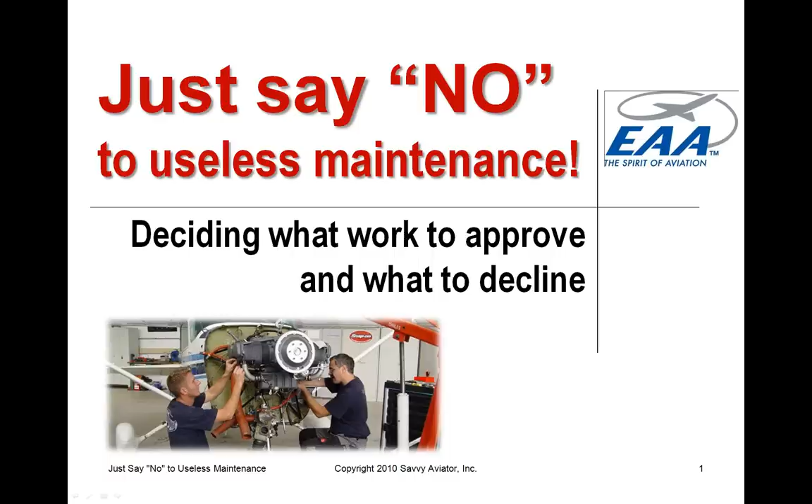Okay, well, good evening, everybody. Looks like we've got about 180 people in the room right now, and that's great. My name is Mike Busch, as Charlie introduced me, and I'm a regular columnist since the beginning of the year in the new and improved EAA Sport Aviation.

The subject for tonight's talk, this is actually a presentation that I first put together for the Forums Plaza at AirVenture 2010, and we're going to try to do it tonight. It's going to be a little challenge because the Forums Plaza presentations are an hour and 15 minutes long, and I guess I'm supposed to fit this into 45 minutes, so I guess I'll have to try to talk fast.

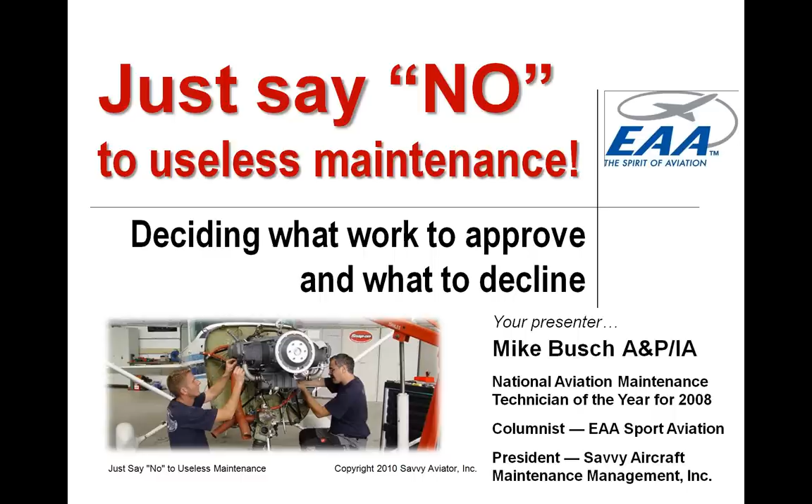In addition to writing a monthly column for Sport Aviation, I spend most of my time these days running a company I started about 3 years ago called Savvy Aircraft Maintenance Management. We're in the business of providing professionally managed maintenance for owner-flown general aviation aircraft, and in that role we manage a lot of maintenance on a lot of airplanes. In the last 3 years or so, we've probably managed about 400 annual inspections.

And the focus of what I'm going to be talking about is mostly stuff that comes up at annual inspections. So I just want you to know that this is hardly theoretical, that we're using the techniques that I'm about to talk about tonight every day.

The aircraft that we manage sort of run the gamut of certificated GA piston-powered aircraft, 90% singles, 10% twins. But we manage more Cirrus aircraft than everything else put together for reasons that just have to do with the demographics of Cirrus owners - they tend to be people that would prefer to hire somebody to manage their maintenance rather than to deal with it themselves. But what we do is no different than what the typical aircraft owner is supposed to do when he manages his own maintenance.

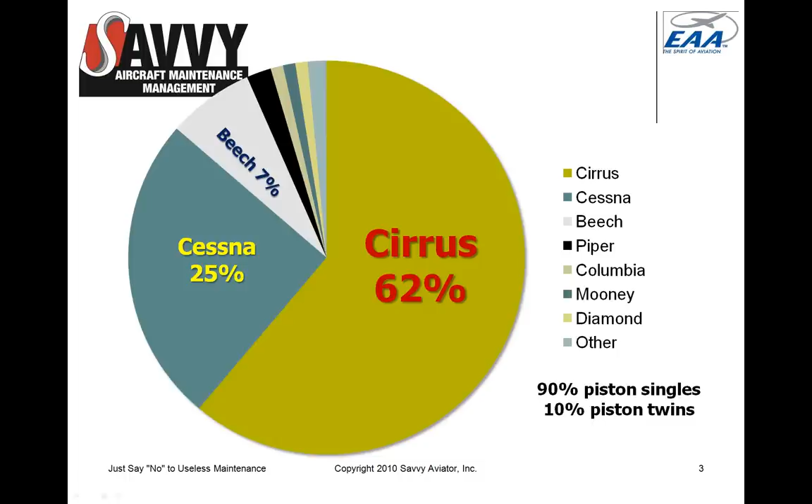And so because we do so many Cirrus annuals, I'm going to focus tonight on a case study involving a Cirrus, but nothing that we talk about is in any way Cirrus specific. I will be talking mostly in the context of certificated aircraft. Things are a little bit different when we're talking about experimentals - for example, we don't do annuals, we do condition inspections. But a great deal of what I'm going to be talking about also applies to experimentals.

And for the purposes of the discussion tonight, I'm going to use as a case study an annual inspection that we got involved in, involving a 2003 Cirrus SR-22 owned by an owner named Allan. I won't mention his last name. But Alan lives in the Portland, Oregon area, and he works up in Seattle, and he uses this airplane pretty much to commute to work, and he sort of just flies up and down from Portland to Seattle and back pretty much every day of the week, and so he flies a lot. This is his commuting vehicle. He bought the airplane 7 years ago. He's got over 1,800 hours on the airplane, in fact almost 1,900 hours, flying about 250 to 300 hours a year.

And he had been in the habit since buying the airplane of having his annuals done at the Cirrus Service Center up just north of Seattle. Typically, these annuals would cost him $5,000 or $6,000 a year. In 2010, he had to go off on a business trip to India just about the time his annual came.

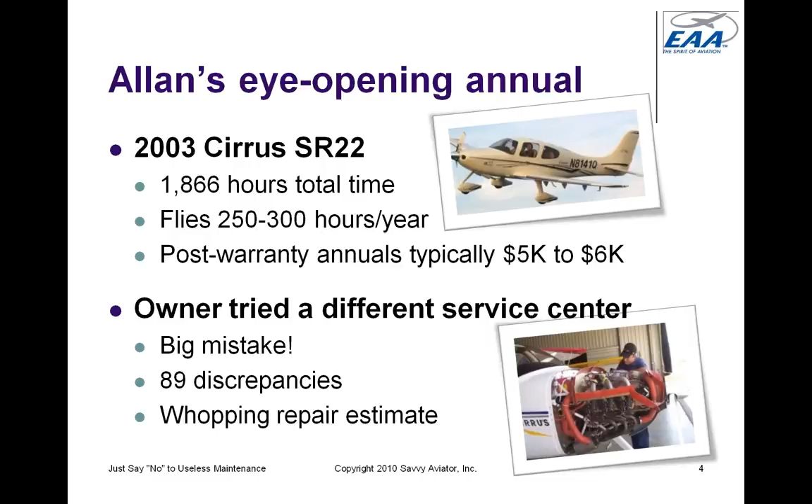Then he got the shock of his life, because about a week later, he gets an email from his shop in Portland giving him an estimate to repair the airplane and make it airworthy, including 89 discrepancies and a repair estimate that pretty much lifted him right off the floor. I'm not sure the slide says 'whopping' does total justice. The repair estimate he got was parts and labor combined, almost $25,000.

That kind of got him. The service center he put the airplane in, in Portland, was probably the worst Cirrus Service Center in the country. In fact, it was so bad that the same week he dropped off his airplane, Cirrus decertified this service center and made a different shop the Cirrus Service Center instead. But apparently Alan had not done very much due diligence into the shop, figured it was a Cirrus Service Center, had to be okay, and then a week later he's in India and he gets an email with this $25,000 estimate.

At which point I got an email from Alan. I took a look at this estimate that he emailed me, and I'll walk through it with you very quickly.

The first line item on the estimate was an annual inspection flat rate, just for the inspection part, at $3,645. That's a little bit high, but not out of limits. Typically the annual inspection on one of these airplanes is somewhere between 25 and 30 hours, so generally they come in around $3,000 or a little less. The $3,600 was high, but this particular shop actually included more stuff in their flat rate than most shops, so I didn't consider it out of bounds.

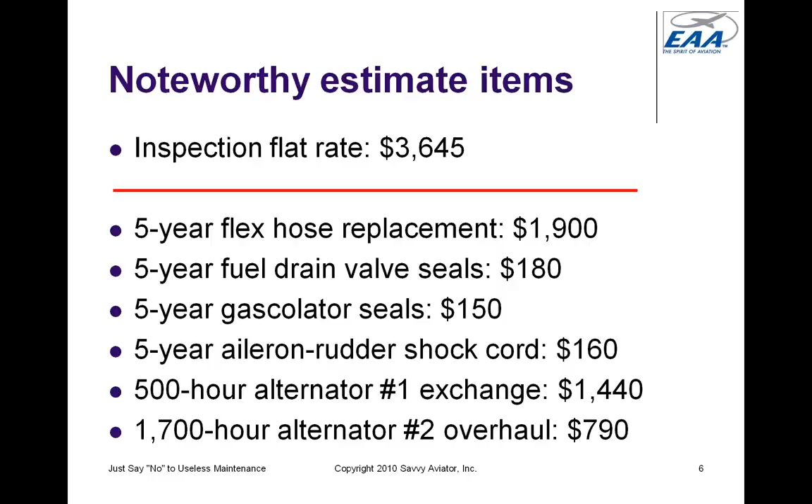The recommended TBO on his McCauley propeller was 6 years or 1,800 hours, whichever comes first, and the overhaul cost is $3,720. It's a three-bladed constant speed propeller. TCM for overhaul of the magnetos every 4 years, $1,700 for the two of them.

Main battery - Cirrus calls for replacing the battery every 2 years, $700. That's a pretty pricey battery. Also, they call for replacing the filter in the TKS anti-ice system every 2 years, $320 parts and labor combined. Fuel injector nozzle cleaning, recommended every year, $200.

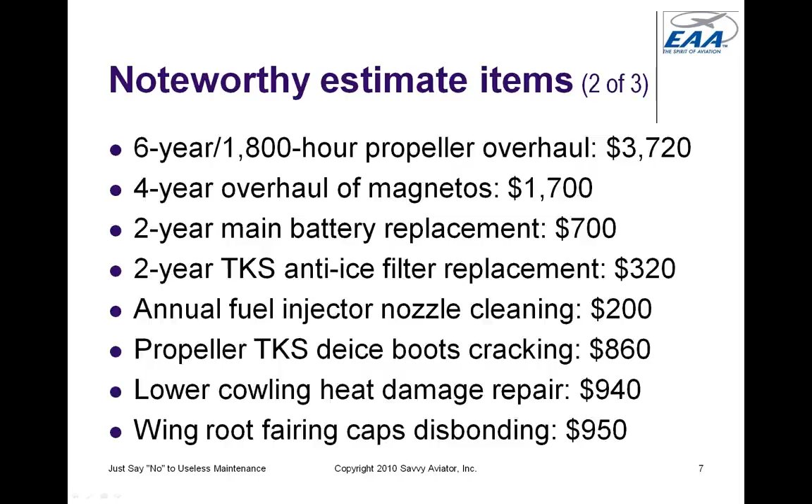The rubber de-ice boots on the propellers, part of the TKS system - the shop reported they were cracking and wanted to replace them for $860. The lower cowling had heat damage in the exhaust trails, and the composite repair charge was estimated at $940. Wing root fairing caps were starting to disbond, costing $950 to reattach. Muffler flame cones were warped, so the shop wanted to replace both mufflers for $2,280.

The airplane still had its original 121.5 ELT, and the shop suggested it should be changed to a 406 megahertz unit, since the 121.5s are no longer being monitored. $1,750 was the estimate for that. Miscellaneous cosmetic paint touch-up estimated at $1,620, plus about 50 additional minor squawks totaling $1,425, for a grand total of $24,730.

Alan had one of these oh my God moments, which we occasionally have, on the management of an annual in the middle of the annual - realizing that if somebody wants their maintenance professionally managed, they need to sign up with us before the annual starts, because picking up management halfway in the middle is generally very difficult. I frankly felt so sorry for Alan that I made the decision to break our own rule and take him on as a client in the middle of this annual. He was off in India, his airplane was in this horrible shop up in Portland, and against my better judgment, we decided to take it on.

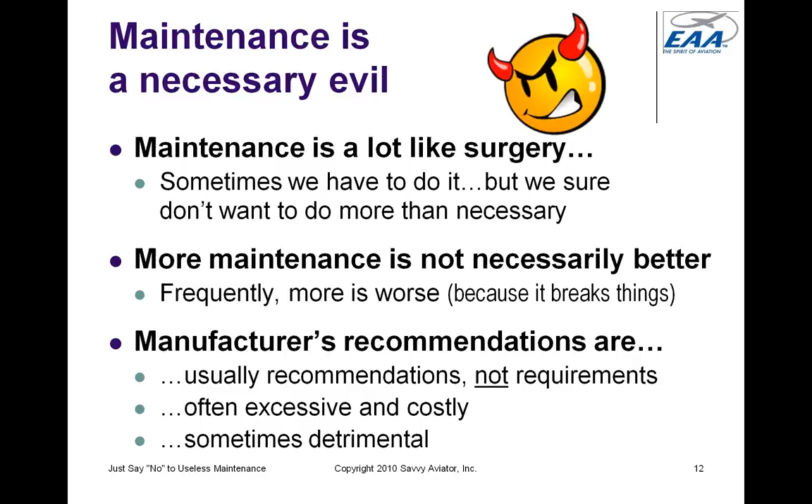We'll get into some of that in detail here. But it is the owner's job to say no to maintenance. Mechanics will always do maintenance by the book - in other words, following manufacturer's recommendations, unless you instruct them not to do that. And the reason they will always do it by the book is because if they take it upon themselves to say, well, the manufacturer recommends this, but I don't think that's really necessary, they expose themselves to serious liability in case something goes wrong.

The number of lawsuits against shops and mechanics has absolutely exploded in the last 15 years or so, as a kind of unintended consequence of the General Aviation Revitalization Act of 1994, which basically took manufacturers off the liability hook for aircraft more than 18 years old. Doing that didn't make the lawsuits go away - it just meant that everybody other than the manufacturer who has anything to do with the airplane tends to get sued a whole lot more than they used to. So there's been an explosion in lawsuits against mechanics and shops in recent years. As a result, mechanics are reportedly very, very nervous about being sued.

And if you were in that position, you'd be nervous too. So they tend to, much more than say 20 years ago, do everything exactly by the book unless the owner instructs them not to. If you instruct your mechanic that you do not want something done that the manufacturer recommends, and you do that in writing - providing something saying 'I decline whatever this maintenance task is' - your written instruction to the mechanic is his get-out-of-jail-free card in the event of a lawsuit, because the reason he didn't do that task is not because he decided not to, but because you made the decision not to do it, and that's really who should be making these decisions anyway.

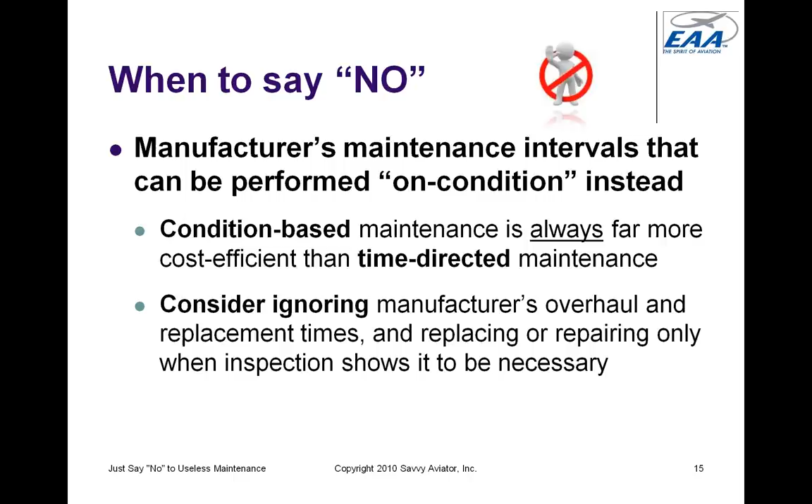So we want to consider ignoring manufacturers' overhaul and replacement times and other arbitrary time-based things, and replace or repair only when inspection shows it to be necessary. The only time we'd do things on a schedule basis is when there's no reasonable inspection that can determine when the work is necessary. Engine, propeller, and other TBOs are excellent candidates for this condition-based approach.

I recommend to all of our managed maintenance clients that they should almost completely ignore manufacturers' TBO recommendations. I have practiced what I preach for many, many years. I've been an aircraft owner for more than 4 decades. I presently fly a

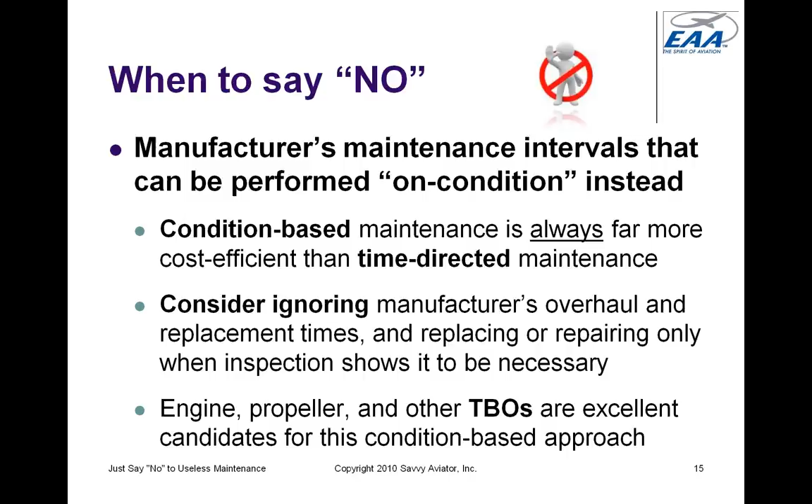Cessna Turbo 310 twin, and the engines on my airplane are rapidly approaching 200% of TBO. Eventually I will overhaul those engines when they start talking to me, but had I overhauled them at the manufacturer's recommended TBO, I would have deprived myself of, I don't know, 10 years of very reliable operation. It just isn't a sensible thing to do in my view.

Another good candidate for saying no to is recommended preventive maintenance intended to prevent acceptable failures - in other words, failures where the consequences are not serious. We need to start thinking about the consequences of failures, because not all failures are created equal. The most serious kind are failures with safety consequences that could hurt or kill somebody, and those are completely unacceptable - we have to do whatever it takes in maintenance to prevent those from happening.

The next level down is what's called failures with operational consequences - failures that aren't going to hurt or kill anybody, but might leave you stuck in Sheep Dip, Nebraska on a Saturday night when you hadn't planned to spend the night in a Motel 6 there. Those are less serious, but since we typically don't like to be stuck somewhere, it's frequently worth spending some money in maintenance to try to avoid those sorts of failures.

The third level of failures - and the overwhelming majority of equipment failures are of this kind - are failures with economic consequences. They won't hurt or kill anybody, won't leave us stuck somewhere, they simply cost money to fix. Generally, it doesn't make sense to spend money in maintenance to prevent failures with economic consequences. The optimum way to deal with them is simply to run the item to failure and then deal with it when it fails.

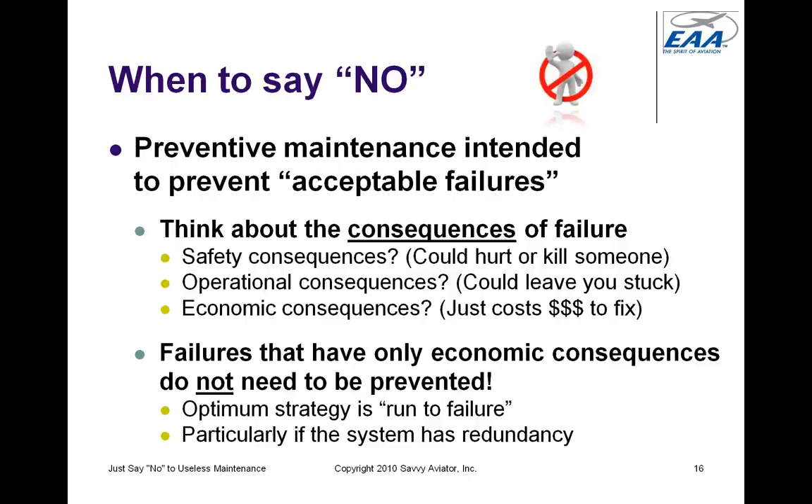Finally, we should always say no to overkill. What I mean is it never makes sense to replace something if it can be rebuilt or overhauled, and it never makes sense to rebuild or overhaul something if it can be repaired. These words all have very specific meanings in maintenance, and owners need to tune in to these words and what they mean, because there can be huge differences in maintenance cost.

One of the most important and most underused phrases in maintenance is inspect and repair as necessary, or IRAN. That means when you ask a technician to inspect and repair as necessary, it means inspect the item and repair it in order to make it airworthy, and then stop. If you tell that same technician to overhaul the item, you're removing all discretion from him, because overhaul means he's required to open the overhaul manual, start on page 1, and go all the way to the end, doing everything the manual calls for, whether or not it needs to be done.

For example, if you ask somebody to overhaul a gyro instrument, he is compelled to replace all the bearings, whether or not they're in good shape, because bearings are an unconditional replacement item in the overhaul manual. If you tell him to inspect and repair that gyro as necessary, he can check the bearings, and if they're bad, replace them, and if they're fine, leave them alone. So by using the word overhaul, or rebuild, which is even more restrictive, you're removing the technician's discretion to do just what's needed and then stop.

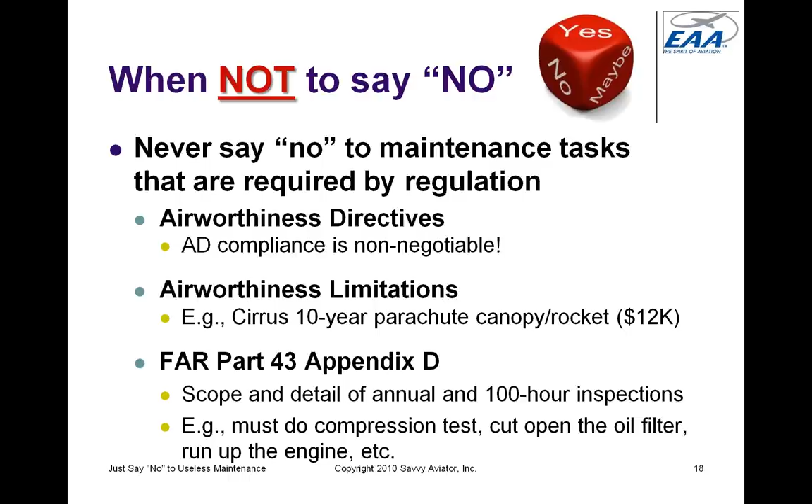He can't sign off the annual without doing all of that stuff. So we don't say no to things that are required by regulation.

Another thing we at least think long and hard before saying no to is any discrepancy that the IA inspecting our airplane considers to be an airworthiness item. An airworthiness item means a discrepancy that rises to the level that the inspector feels he cannot declare the aircraft airworthy and approve it for return to service unless that discrepancy is resolved. There are one of two reasons an item might be an airworthiness item: one is that he feels it's not in conformance to its type design, the second is that he feels it's not in condition for safe operation.

This is one area where it's a little different for experimentals. In experimentals there's no type design, so the only criteria is whether it's in condition for safe operation. For certificated aircraft, we have two different criteria to meet: it has to conform to its type design, and it also has to be in condition for safe operation.

Now, the general rule is that if the IA says it's an airworthiness item, we pretty much have to approve the repair. However, there are some IAs that are ultra cautious — there's some other words I could use too — that call almost everything an airworthiness item. And if you wind up in the regrettable situation of being stuck with an IA like that, calling all sorts of minor things airworthiness items, then I would recommend you go get a second opinion from another IA.

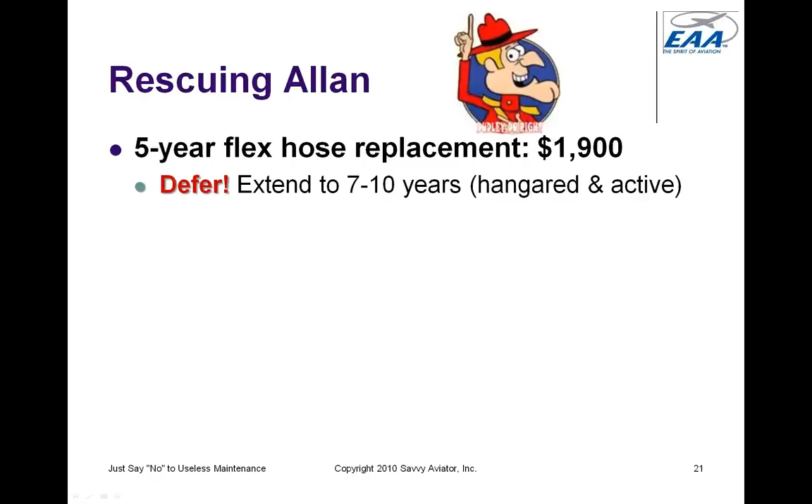But the 5-year recommendation is a very conservative recommendation that's calibrated to the worst-case aircraft, like most of these time-based recommendations are. And we knew that Allan's aircraft was in much better shape than the average aircraft because it was always hangared and because he flew it with extreme regularity. Based on what we knew about how he flew the airplane, we recommended to Allan that the flex hose replacement be extended to 7 to 10 years rather than the manufacturer recommended 5 years. And he agreed that we would defer this item and do it in a year or 2 or 3.

The 5-year fuel drain valve seals, that's a totally silly recommendation. Either the quick drains are leaking or they aren't. If they're leaking and there's blue stains on the hangar floor, we'll try to blow out the drain valves with shop air, which fixes the problem about half the time. And if it's still leaking, then we change the seals. To change the seals on a 5-year basis or any kind of a time basis is just plain silly. Fuel drains don't suddenly open up and start draining large quantities of fuel out of the tank. As the seals age, they gradually start to leak, and we start seeing stains on the floor of the hangar. That's the time to deal with it, not on some fixed basis.

So we said no, let's not do this. Fuel drain seals should be dealt with on condition, not on some fixed timetable. Same thing for the gascolator seals. If it isn't leaking, leave it alone.

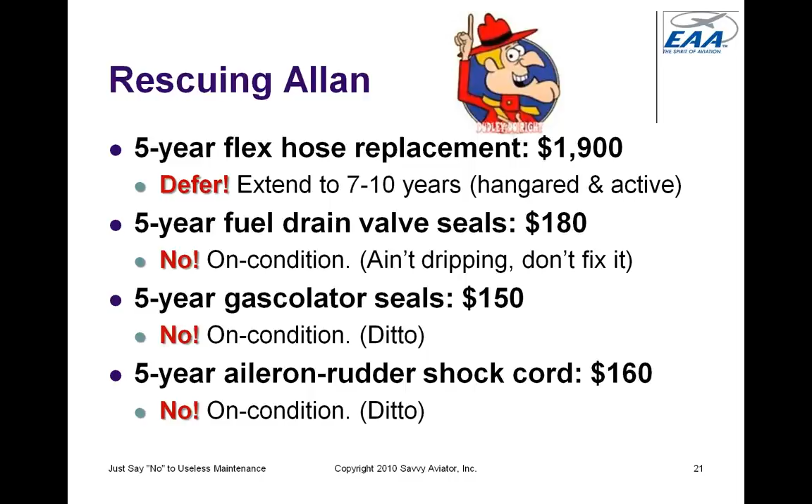Aileron rudder shock cord, the same thing. If the aileron rudder shock cord, this is the aileron rudder interconnect, starts to wear out, the airplane will fly a little bit crooked, and you'll know that there's a problem. Even if the shock cord totally snapped, it wouldn't render the airplane unflyable. It would just render it slightly out of rig. So this is not something that we need to do on a timetable. We do it on condition.

I already talked about the alternators. That's an absolutely crazy idea to replace the alternators at 500 hours because of the extremely high infant mortality failure of these alternators. If your alternator made it to 500 hours, it's one of the good ones. You want to hang on to it. We treat alternators as a run-to-failure item on Cirruses because Cirruses have so much redundancy in the electrical department.

Same thing for alternator number 2. We treat it as a run-to-failure item. In fact, alternator number 2 is not even a required item. It's only required for IFR flight. So we just run those things to failure.

Propeller overhaul, same deal. McCauley recommends a 6-year overhaul cycle on these propellers because they're worried about corrosion. But an airplane that flies as regularly as Allan's does, that's just a total non-issue. So we recommended holding off on the prop overhaul, which is just a recommendation. It's not a requirement, and to overhaul the prop at the time the engine was overhauled.

4-year overhaul of magnetos is nuts.

There's basically nothing in the magneto that deteriorates with calendar time, and that 4-year overhaul is not a required item, and nobody in his right mind would do it. We recommend doing an IRAN every 500 hours, and IRANs typically cost between $300 and $400 per magneto, a tiny fraction of what an overhaul would cost.

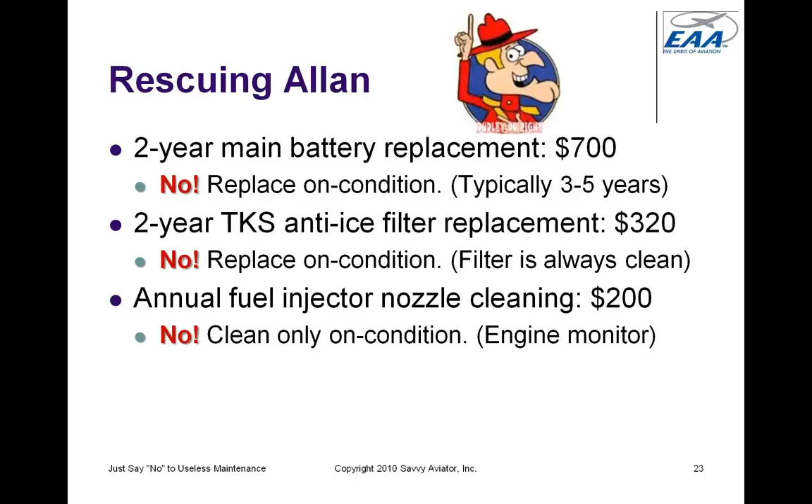All of these Cirrus airplanes, and frankly most high-performance airplanes these days, have a digital engine monitor that will clearly show if there's a clogged nozzle. If the engine monitor indicates that there's a clogged nozzle, then we will remove only that nozzle and clean it, but we always say no to doing it on a time-based basis, and certainly not doing it every year.

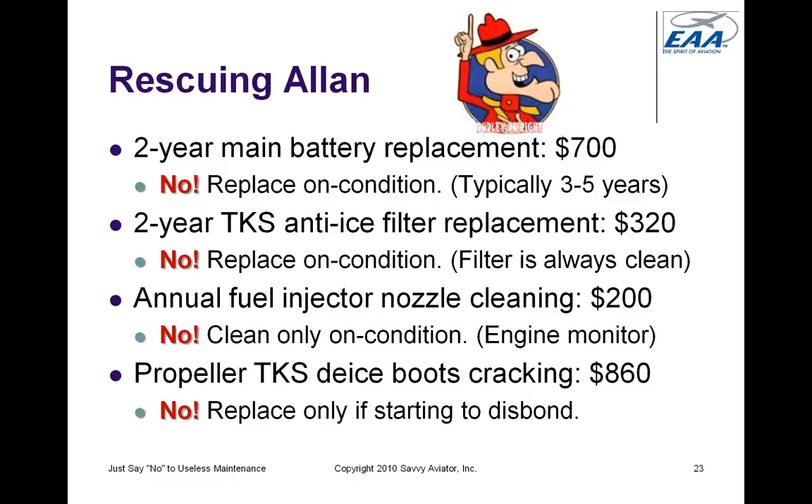The TKS de-ice boots cracking on the propeller — we asked the shop to send us a photograph of it so we could assess how bad it was. We looked at it and determined that the cracking was only cosmetic and that there was no reason to replace the de-ice boots until they got to the point where they were threatening to debond from the propeller, so we declined that item. We also asked for a photo of the lower cowling heat damage.

We took a look at that photo and decided that the damage was bad enough that it needed to be dealt with. We considered that if it got significantly worse, it could be a safety of flight item, so we approved that repair.

The same thing with the wing root fairing caps. Unfortunately, Cirrus, in its infinite wisdom, puts those fairing caps on with two-sided tape, and after a while the tape gets bad and the fairings start to debond, and we need to do something about that because we don't want them departing the airplane in flight. So although that was a $1,000 item and it's kind of painful to do, we approved that work because we felt that it was something that needed to be done.

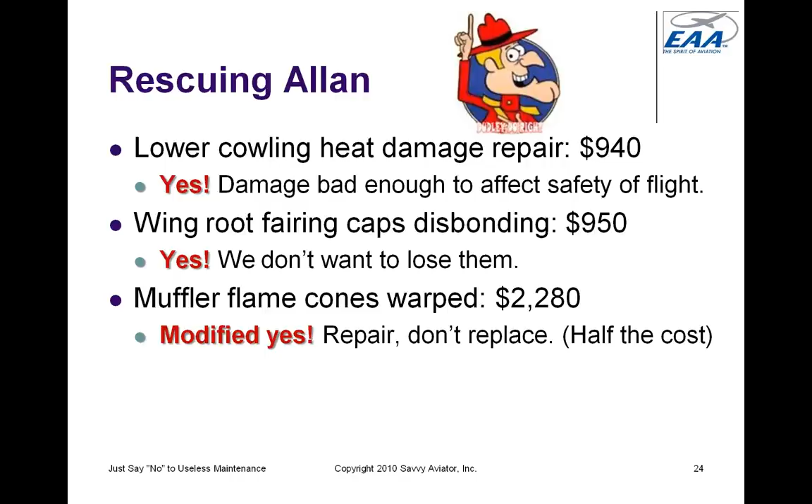The flame cones that were warped, we did approve repairing those, but we instructed the shop, instead of replacing the mufflers, to send the existing mufflers out for repair, which roughly halved the cost of that repair and saved the owner a little over $1,000.

On the ELT, we recommended that the owner hold off because the company that makes his existing ELT, which is an ACK model E01, is about to come out with — no, they're just waiting for final approvals on an ACK E04, which is the 406 megahertz version of that same ELT. If he installs the E04, it will cost him only about 1/3 of the cost of installing the ELT that the shop was recommending, since it's simply a direct drop-in replacement.

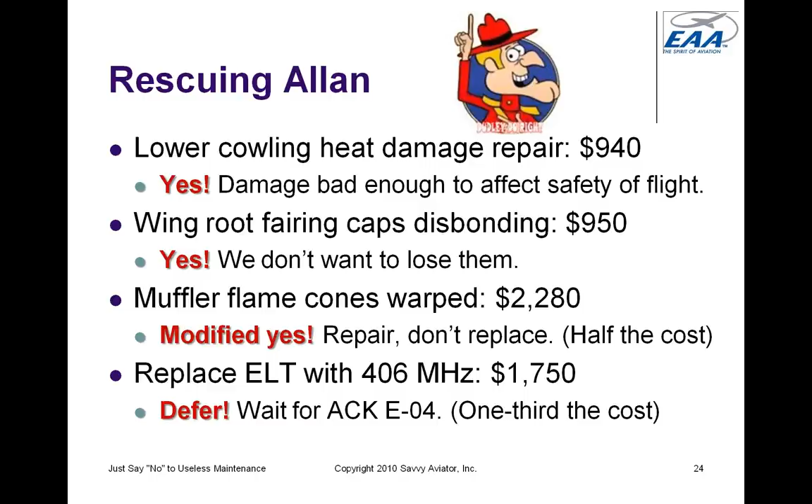The 50 additional minor squawks, most of those we wound up saying yes to. I won't go into those, but most of them were things that were worth repairing, and most of them were relatively inexpensive. So we said yes to the majority of those.

The bottom line was that the final total invoice came out to be about $8,000, and we saved the client about $17,000 on this annual by judiciously saying no to the appropriate stuff.

Now let me point out that this was a very unusual case. We don't typically get $25,000 estimates on Cirrus annuals. This one was particularly over the top, and so we were able to save the client an extraordinary amount of money.

We don't routinely cut the cost of annual inspections by a factor of 3, although we did in this particular case. But we do routinely reduce the cost of maintenance by thousands of dollars per year for most of our clients, mostly by judiciously saying no, and partly by giving them advice as to what shops to use so they don't get in this situation in the first place.

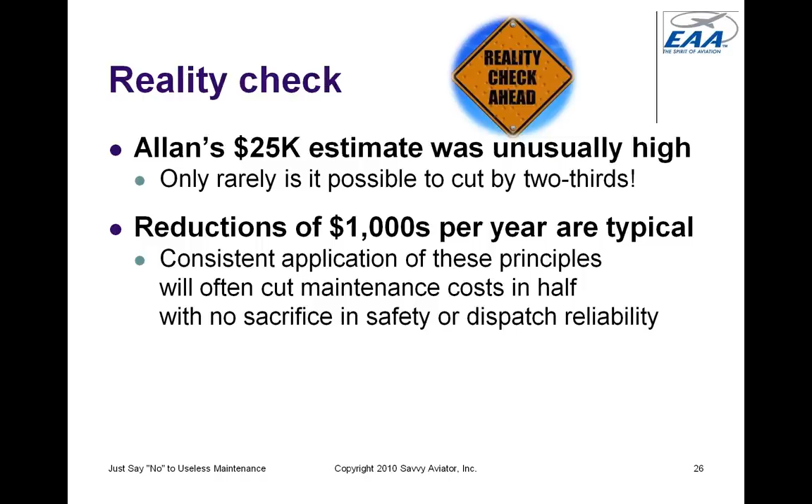As I said, this isn't theory. I've been using these techniques for the last 20 years, and I've been teaching them to owners for more than a decade. For the last 3 years we've been employing them in our managed maintenance program. We've done roughly 400 annuals in the last 3 years, and we consistently save the clients a great deal of money using these techniques.

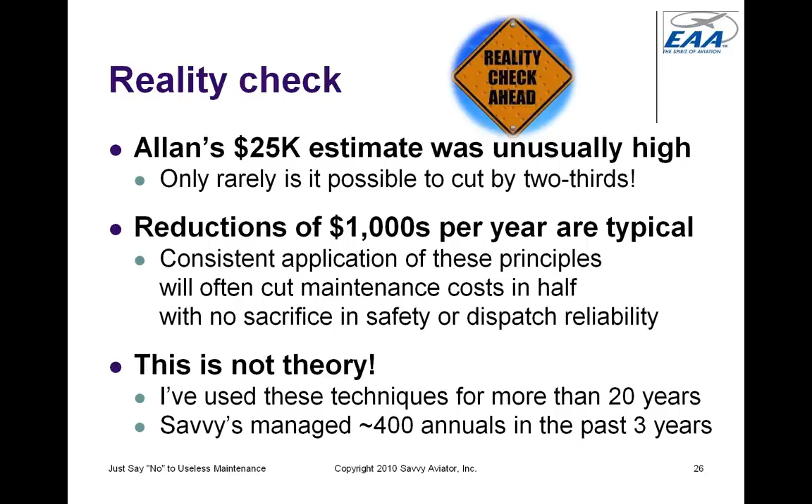So that's pretty much it. Charlie, can we open it up for comments?